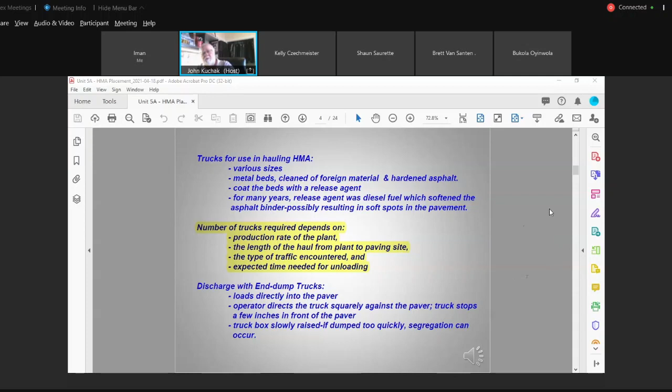Actual paving, 2 kilometers. That's a small job. Sometimes they'll pave 10 kilometers in a day, depending on how many lifts. Typically they'll put the first lift down, and many times they don't do the second lift till later, and they'll put traffic on the bottom lift. They'll do the other lane, then flip, or do the second lane bottom lift, then second lane top lift, then switch back to top lift lane one. So again, whether it's one lift or two lifts.

So this is key. Number of trucks required depends on these four factors. Okay, discharge with end dumps.

He loads directly into the paver. Look at that, he backs up, and then the paver picks him up. Never have the truck back into the paver, because if the truck is backing up and he bumps that paver, you got a bump in the mat. It's no different than stopping. So actually the truck stops short of the paver, the paver comes up and picks him up. He's got dollies on the front of the paver that pick up the hubs. Truck's in neutral, and then the paver pushes the truck. All the truck operator does after is boom his load up and down to feed the hopper.

So he loads directly into the paver. Operator directs the truck squarely against the paver. Truck stops a few inches away, actually - that should be a couple of feet, a few inches is pretty close. But what we're trying to say is the truck should not bump the paver. Then he slowly raises his truck bed and the asphalt starts to flow into the hopper. The hopper is the storage device of the paver, and then it goes through the paver and is extruded out the back, and the screed levels it. We'll look at that shortly. So this is how it's done with the discharge.

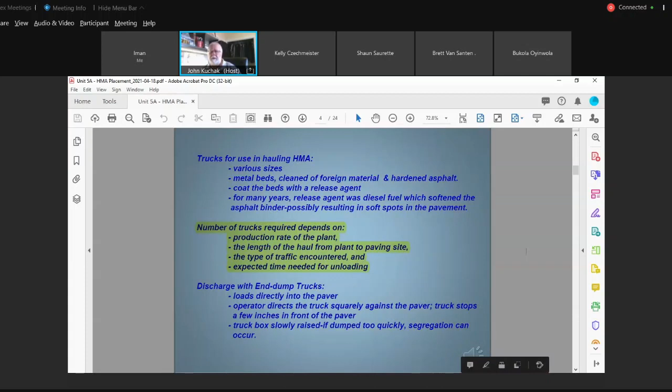Okay, so here's the self-propelled paver. You can see the truck.

On a small job - I noticed they did it here in St. Adolphe one time, they put a little bit of an overlay over our main street, and they did a terrible job, but they didn't use a paver. They probably just used either a grader or maybe just a screed box. Graders can be used, but it's seldom done because it's hard to get the proper slope and the proper screed, and then you've got to have compaction. So many rims got damaged. That happens, yeah.

But again, it's also the operator on the paver - he's got to know how to slowly pick them up. When you watch the video, they talk about maintenance of the equipment and the cleaning of the equipment. If those dolly wheels on the paver aren't smooth and they've got buildup of AC or whatever, he's going to damage those rims, scratch them and so forth. And some of those drivers really take pride in their trucks, especially if they've got the nice chrome wheels.

Anyhow, so grader is very seldom used - you don't have the control. Purpose of the paver is to place the HMA at proper width and thickness, and you want to get a good tight mat. I've seen so many mats, poor, poor, poor, poor. The bottom lift, I know they don't take...

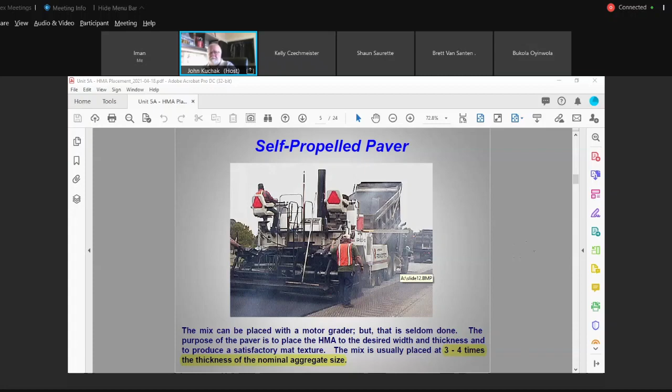Okay, so here you can see it in action. It hasn't changed much since the 1930s. Same principle. You get hot mix, dump it in the hopper, and you screed it, pack it, and you get a flat mat on the backside. Well, not flat; sometimes you're going to have crossfall, you're going to have drainage to one side, if you're doing one lane and then the other lane.

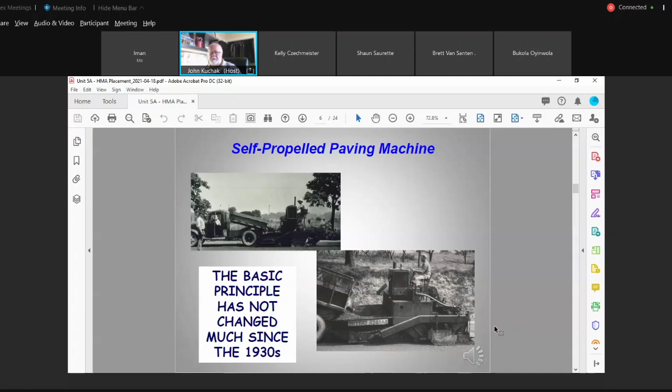This is why you don't have the truck back up into the paver. Bottom dump trucks can be used when a pickup device is used to feed the windrow left by the truck to the paver, these belly dumps. It is essential that the windrow deposited by the truck be as uniform as possible, because as you're picking it up, you want to feed the paver uniformly.

Windrow material can cool below spreading and compacting temperatures in cool weather. This can be a major problem if the paver has a malfunction. To prevent excessive cooling of the mix in cool weather, limit the length of the windrow to no more than one truck ahead of the pickup machine. Important there.

So essentially, the pavers aren't very large. I mean, it's amazing the amount of material they can place. They'll extend their screed many times if they're going to be paving the shoulder at the same time or turning radiuses. So they have a fair amount of...

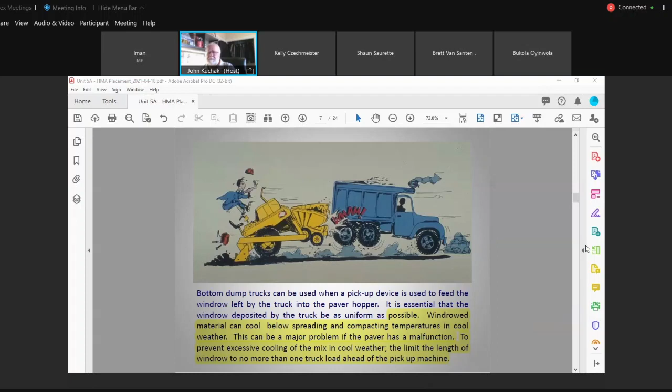Okay, I'm getting messages popping up here.

Okay, and don't worry, you don't have to know the mechanics of the paving operation and how it works. I'll just go over it real quickly, but it gives you an idea. You've got the hopper that feeds the asphalt through the machine, and there's your back screed. On the slip-form paver, for concrete, you've got your augers in the front that level the concrete to a uniform height and thickness to feed the machine. You have the back screed, the same thing. It's fed through the hopper.

The screed, believe it or not, gives you compaction too. It's very important. The screed should be in very good shape, shouldn't have any nicks, and that screed can be adjusted to give you crossfall. And it's set up. Those of you that may have done density testing, if you don't have, say, 85 to 89 or even 90% compaction just from the screed alone.

So in other words, before the rollers come on, if you're standing on the back of that screed and you put your nuclear gauge down and do a density in the backscatter method, and you know what the Marshall density is going to be, let's say from the previous day, if the screed isn't giving you 88, 89, 90% compaction before the rollers, you're not going to get it. You can roll compact till the cows come home. You're not going to get it.

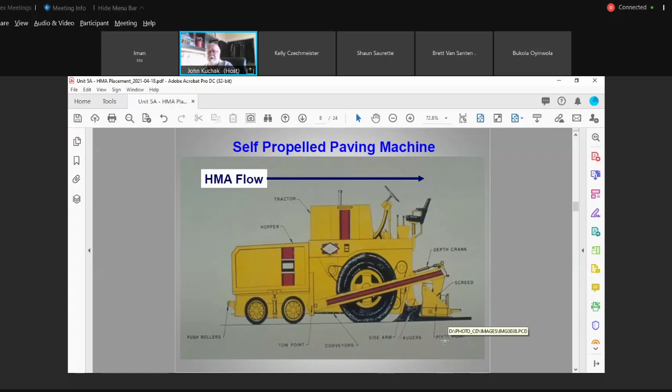That screed, believe it or not, gives you a lot of compaction. So always look at it. Look at the maintenance. Make sure there's no buildup of material underneath it. Make sure it's level. Make sure there's no nicks, gouges. It's key because that's also going to affect the texture or the appearance of your mat. And this is just a single tow point. This is just the screed itself that you would pull off. And you can see you can get an angle of attack here.

The screed unit towed by the tractor establishes the thickness of the mat and provides initial texture to the new surface. The screed also imparts some level of density. The principle of the free-floating paver screed was developed in the early 1930s. So when you're watching a paving crew and the paver is using string lines, just like a slip-form paver will follow a string line to give you your elevation, the machine can move up and down. The screed should stay level because it should be coming off string lines.

That concept allows the paver screed, which is attached to the tractor unit at only one point on each side of the machine, to average out changes in grade that are experienced by the wheelbase of the tractor. So the tractor can go up and down, but you want that screed to follow a certain elevation, certain crossfall, certain mat thickness. So it's called a floating screed, and it's got a single tow point.

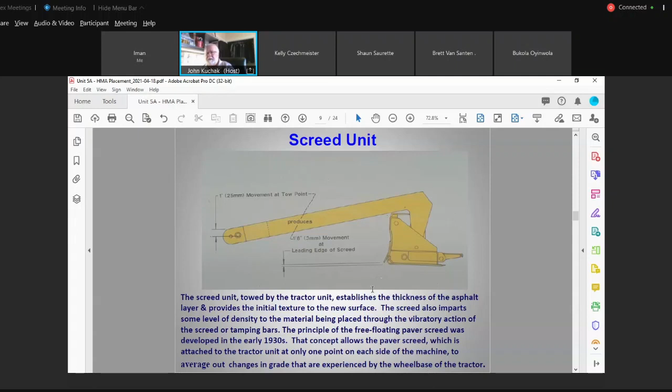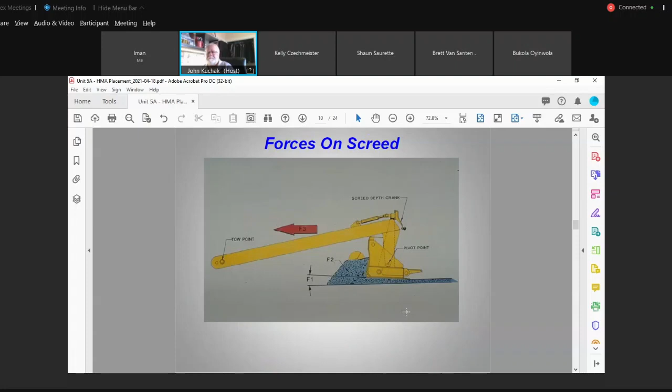I'm not going to go through this. This explains how the forces work. I would read it just for your own interest. I'm not going to quiz you on it. Obviously, at this point in time, we're not paving contractors. However, many of you guys may be involved on a paving crew. So those 3 videos that I've uploaded are actually pretty good because they highlight a lot of the things that the inspector has to look for. So it's a good resource. Okay, forces on the screed, and this is going to give you the quality of the mix that you want.

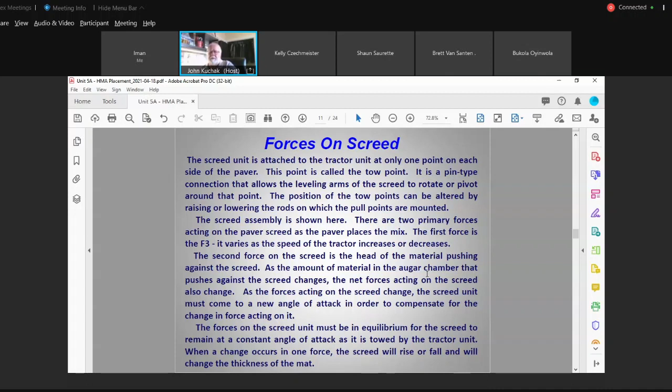Sometimes you may have too many trucks. There's nothing wrong in having trucks waiting on the job site as long as it's not too long. If they sit too long, even if they're tarped with insulated tarps, you'll see a lot of the guys will pull up on the job site and they throw the tarps back because they want to be ready to back in. Something happens, now you got to go back out, close the tarps up. B, you got to be able to schedule your job, and it's not easy because there's too many outside circumstances that sometimes come into play that you may not have any control of.

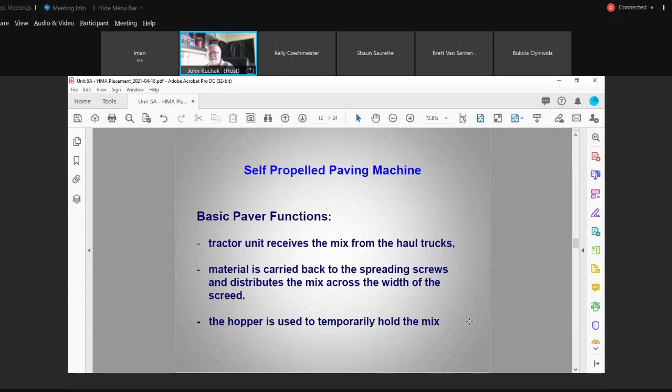Okay, so you've laid the mat down, you've extruded it out the back, screed, compacted it. The guy on the back has been checking the depth from time to time, and you'll see in the video how they check for depth. You see how they adjust. They have screw feeds on the side, on the back there, where they adjust the screed up or down. Typically, you shouldn't have to adjust too often. Sometimes you're on a job site and you see the guy just back and forth, back and forth. He keeps playing around with those controls.

You got to remember, it's not instantaneous. It's going to take a while before they finally get that elevation. So when you see, as they call it in the video, can't remember the term, Whirly John or John Whirly or something, he's always whirling those height adjustments. It takes a while before you finally zoom into the required elevation. It's not instantaneous. So now we're ready to compact, okay?

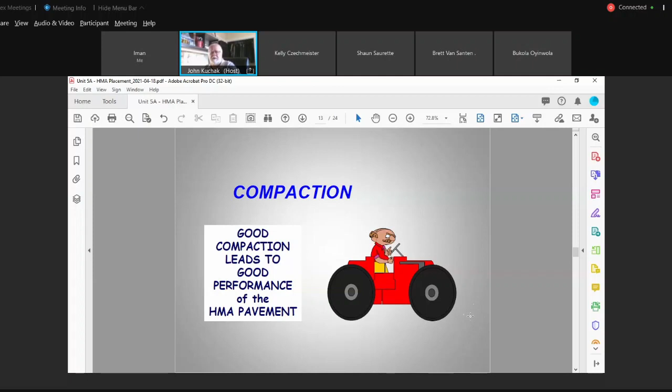And again, this is key. You're gonna have a great mix, excellent mix. But if you don't know how to place it and you don't know how to compact it, your job's gonna suffer. You're gonna have poor compaction, poor densities, higher voids, you're gonna have a very permeable mix. Oxidation is gonna take place, freeze thaw, okay? So good compaction leads to good performance. That's key, as the guy states.

What is it? It's a process. We compress the mix. We reduce the volume. Doesn't matter whether you're talking about granular A base, B base, granular materials. You're compacting. You're consolidating. You're compressing the mat, the layer, whatever you want to call it, and therefore you reduce the volume. Reduce the volume, reducing voids. And a lot of times, high voids is going to give you problems, whether we're talking about asphalt concrete or we're talking about base soil, whatever.

So there's some key points here as to why we compact. We know many times why we're compacting base materials. Okay, we want to prevent further compaction. We know we're going to get further compaction with repetitive traffic. As time goes on, your pavements open up to traffic, your vehicular traffic, heavy trucks, cars, whatever. But you're going to get further compaction.

Obviously, we're going to provide shear strength against rutting. We compress it, we compact it, we're going to get good resistance to rutting. Decrease the voids, we're going to decrease the permeability. Less infiltration of water, less freezing if it's in the fall or early spring. Low temperature cracking: we've got a tougher mat, more durable, there'll be more resistance.

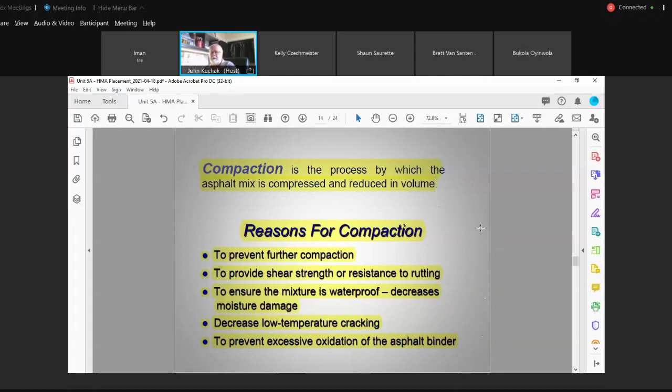We also know now the temperature is going to be key. We know the temperature was key in the Marshall stability and fabricating the Marshall briquettes. Remember, we had a mixing temperature, the AC and the aggregates. We also have a compaction temperature. If the temperature is too cool, we're not going to get compressibility. We're not going to get that compaction. It's starting to stiffen. The viscosity has changed. We're getting higher viscosity.

If it's too hot, and not only from the Marshall point of view but from the construction point of view, the paver is pulling ahead, and the compactors cannot keep up because the mat is too soft, it's too tender. It won't support the rollers. So they're going to wait a while until it cools off. Meanwhile, the paver's moving ahead at a fast rate because the plant is pushing out asphalt and trucks, and the trucks are lining up on grade. There's your problems. So many factors come into play.

So now temperature is critical. Too cold, can't compact it. You can't get the density. Too hot, won't support the rollers. And you're going to have a series of rollers. We're going to look into that. And in the video, you'll also notice the key points. So temperature: critical, critical, critical, it all comes into play.

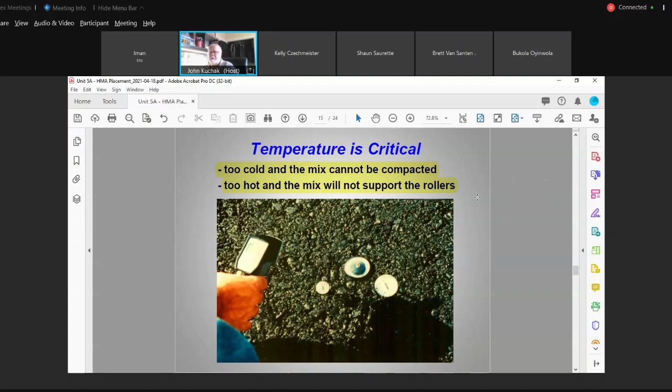We're going to look briefly at some of the rollers. You've probably seen these, the vibratory rollers. They are also static, so you can just have the drums rotating. There's no amplitude, there's no vibration. You've seen them many times on granular base when they're building it, they'll be vibing. In other words, they've got the vibrators on, you can feel it.

For asphalt, he's got a sequence here. He can go in with the vibes, back out static, static, vibe out, vibe in, vibe out, back and forth. Again, you see these guys on the job site and everybody says, oh, what an easy job. Not right.

Performance of your mat is based on how good of operators you have on these compactors, if they know their stuff or not. Because again, the mix might be good. Construction is going to kill that mat. It's either going to improve it or it's going to make it really bad if you got inexperienced operators. So yeah, it seems like a boring job, but that's one of the most important.

It's like everybody says on a paving job, the flag person is the low man on the totem pole. The flag person on any paving job has the most important job. They may have the less pay, so that doesn't go hand in hand. But a flag person on any job is key. If they're sleeping on the job, you can have fatalities. They're looking at the safety of the public, the motoring public.

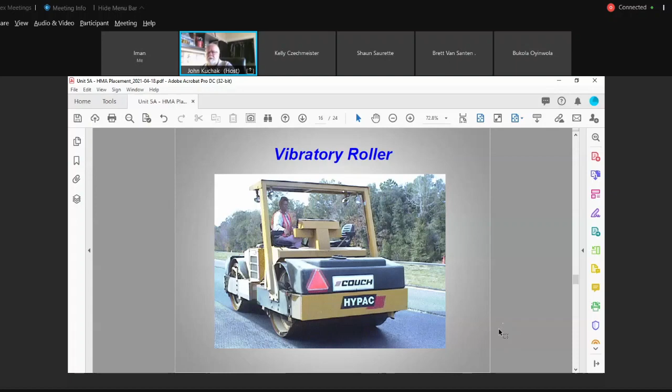So the same thing here on these pavers. You're driving these compactors back and forth, and everybody says, "Oh, what an easy job." Yeah, right. I wouldn't want it. You got to know what you're doing. So there's a lot of configurations. Here you got a single drum or double drum. Typically, you use steel drums for the breakdown rolling. That's a phase that's referred to. The breakdown is the initial compaction right behind the paver. You'll see that these will be steel drums.

That breakdown rolling is the initial consolidation of that mat or compressibility. You've got to get that density. Again, if the screed isn't giving you that density, that's a problem right off the bat. Gotta have a certain density from the screed. The static form is from the weight of the roller and frame. It's just a dead weight. It's the weight of the machine, the weight of the drums, and so forth.

Dynamic, they have a rotating eccentric weight in those drums. It's like a cog. But you can then adjust the frequency and the amplitude. Amplitude is the up and down vibration. Frequency is how many times it goes up and down, say, per minute. So again, the guy on that roller in the breakdown, he's got to know what he's doing. This should say single steel drum or double drum, but okay.

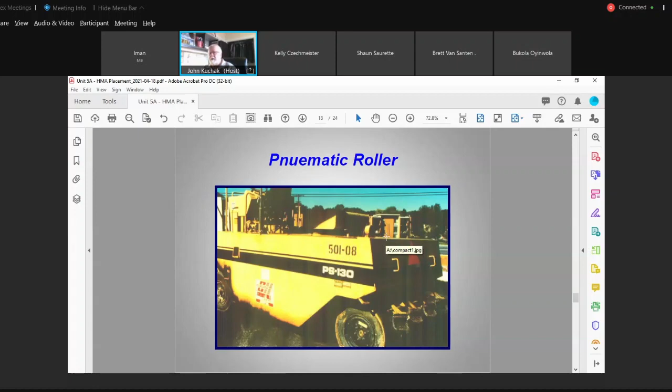You'll notice that these guys can put ballast into the hopper of the roller, if you want to call it, right in there. This is like a bed. They'll put aggregate in it, lots of it, if they want to increase the dead load. These machines have a certain amount of dead weight from the manufacturer, just the framework and the tires and everything else. But you can also increase it by putting ballast. By ballast, we just mean weight. Concrete rubble, A-base, whatever. Just put it in the back for extra weight.

If it's a tender mix, you want to use low tire pressure. Makes sense. Stiff mix, obviously, you want a higher tire pressure. In the video, it'll ask, should you change the tire pressure from wheel to wheel? If you've got a stiff mix, you need higher tire pressure. But you may have 7 or 8 tires around the back and the front. Should you adjust the tire pressure differently in those 7 or 8 tires across? Or should they all be separate? Anybody? Shouldn't they all be the same?

You got it. They've got to be the same. Because remember, you're going across the full mat, so you want that pressure evenly distributed across the full mat. If your tire pressures are off, whether on the outside or the interior, or you may have two at one pressure and the third tire off, you're not going to get even, uniform compaction. As an inspector, believe it or not, I don't know if the guys with MI or the city have ever gone out there and checked those pressures, or had the contractor check them while you're witnessing.

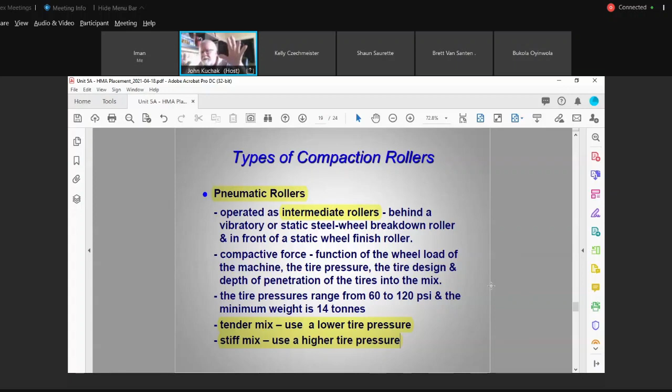Steel wheel rollers - we use them for final rolling. So you've got this single drum or dual steel drums for breakdown, to get the initial compaction. You've got the pneumatic for the intermediate rolling phase, to tighten up and remove the ridge marks left from the breakdown roller, giving extra compaction. Then you'll have the smooth drum final rolling, which takes out the ridge marks left by the pneumatic tires.

Especially if the mat is still a little on the hotter side, you may get more imprint of those wobblies. The steel drum final roller will take those out. You want to have a smooth, tight mat.

Again, based on weight, they can either be three-wheeled or tandem. I've very seldom seen a three-wheeled here - doesn't mean you don't have them, but typically they're tandem. I've also seen configurations with wobblies in the back and a steel drum in the front, so you've got dual. Different configurations, but essentially you've got the breakdown rolling, the intermediate rolling, and the final rolling.

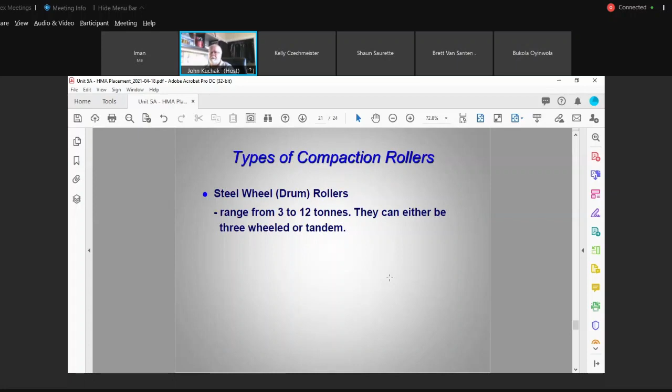Okay, now, how many of you guys have been involved in the coring of pavements? Why are we coring? We put a nice mat down, now we're going to screw it up by having holes all over the mat. What's the purpose of the cores? Anybody?

Calibration of the nuclear density gauges. Yep, and what else? Testing the actual density of the asphalt. Yes, and that's probably how you're going to calibrate the gauges - you determine the actual density of the cores, weight in air, weight in water, just like a briquette. You take a series of readings with a gauge beside those cores, and correlate the density reading by gauge versus true density. The true density is cores, weight in air, weight in water - you can't go wrong with that.

The nuclear gauge can be affected if you've got a thin lift, especially if this is the bottom mat. Typically you're going to calibrate your gauges on the bottom mat because you're going to cover it over with a top layer. But the mat on the bottom might only be 40 to 60 millimeters thick.

Even in the base, in the backscatter mode, when you're taking densities with that backscatter gauge, it's shooting through the mat, picking up the granular base density, and coming back up - the density you get in the gauge is now the density of the asphalt plus the granular base. If the densities are the same, or very close - say your asphalt density is 2300 and the base is 2300 - then the gauge doesn't know whether it's all granular base, all asphalt, or half and half. All it knows is it's got the same density.

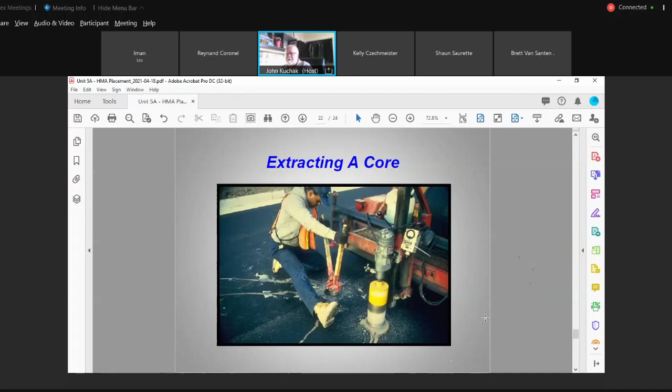Okay, so cores - we take them out for determining density and thickness. Those are the two main reasons, taken for density and/or thickness determinations. On an end product specification, he may have penalties if he doesn't put down a minimum of 80 millimeters or whatever the spec states.

Typically, you'll take it from the sample that you're placing. Bulk specific gravity of the core is determined, and using that with the maximum specific gravity or Marshall density, the percent compaction is calculated.

Many agencies don't use Marshall densities. They'll say that for this mix, the maximum theoretical density is such and such. So their specification is a certain percent of GMM or maximum density, not maximum specific gravity, maximum density. City of Winnipeg, I believe, and MI talk about percent of Marshall density.

So in other words, you're sampling asphalt periodically from the project site. You take it to the lab, you compact it, and you're going to try and determine maximum density on those cores. Typically you'll have them before the next day, because sometimes they don't do those densities, whether it's with a nuclear gauge or cores, till the next day.

So now they'll say, okay, for the 5 samples that were obtained, the Marshall densities are this. So the test taken on that area that the first sample was obtained from, you would use that Marshall density. Then the next Marshall density.

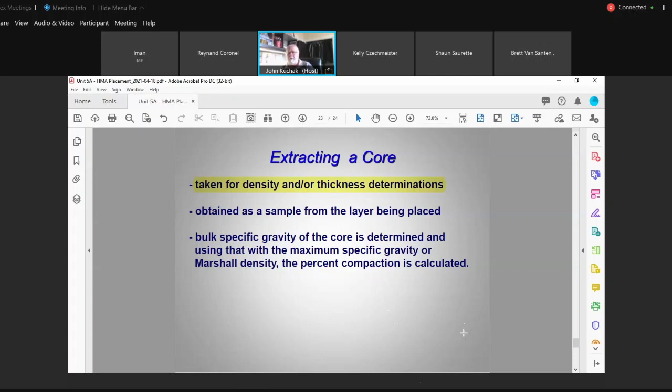So, okay, cores - weight in air, weight in water, and you can calculate bulk specific gravity, then you can calculate your density based on temperature of the water. Okay, any questions?

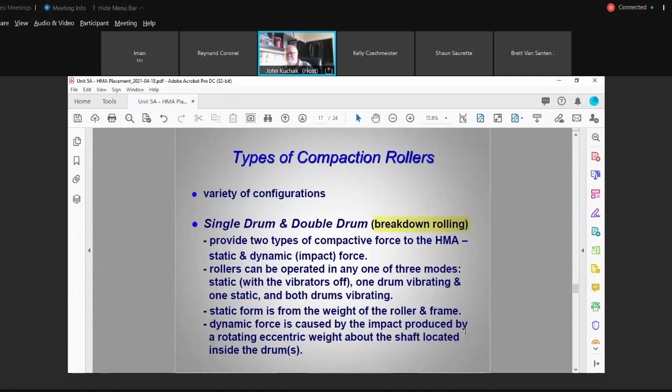It's pretty straightforward, but there's so much that comes in, and that video - like I'm saying, typically when we've had face-to-face classes, we would go through those videos in class. I know through WebEx it doesn't always show up really well, but I am insisting, please watch those 3 videos. I've got questions pertaining to it because it's reinforcing the placement here. Covers a lot of things. It covers the point of how you make a construction joint.

Remember, we have construction joints in concrete. You finish paving for the day, you put a bulkhead in, the next day you continue from that joint. Same thing with asphalt - you're paving 30 kilometers of highway, first day you're going to place and compact 5 kilometers, you've got to put a joint in it. The next day you've got to make sure that those joints butt up at the proper elevation, proper crossfall, and good bond. So how you leave that joint at the end of the day is going to be very important as to how you take off. And that video goes through something like that.

Now, I don't have any questions on the joint - I'll be honest with you. I don't have any questions on the joint construction. I've got a few other questions, but not many - I've got 3 or 4 questions pertaining to the video. I think it's a good resource also for future work if you guys are going to be graduating and working on paving jobs. It's good to watch. Any questions so far?